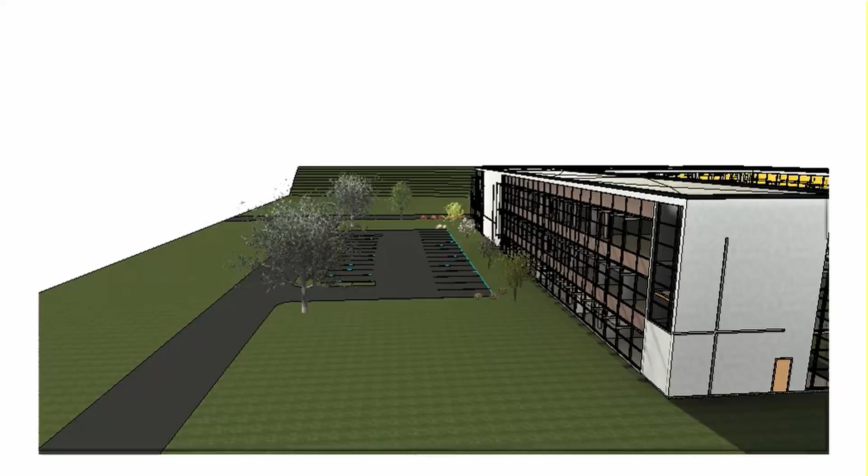Revit software is a building information modeling tool that allows building professionals to track and observe different design stages of the building life cycle in the virtual world.

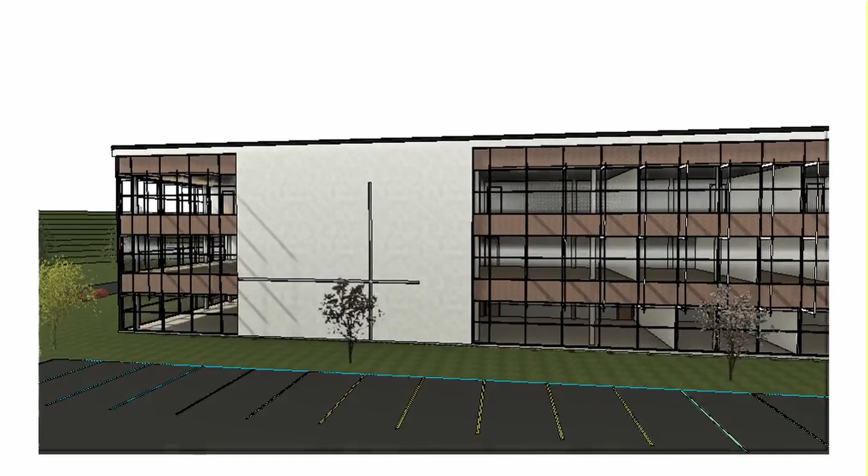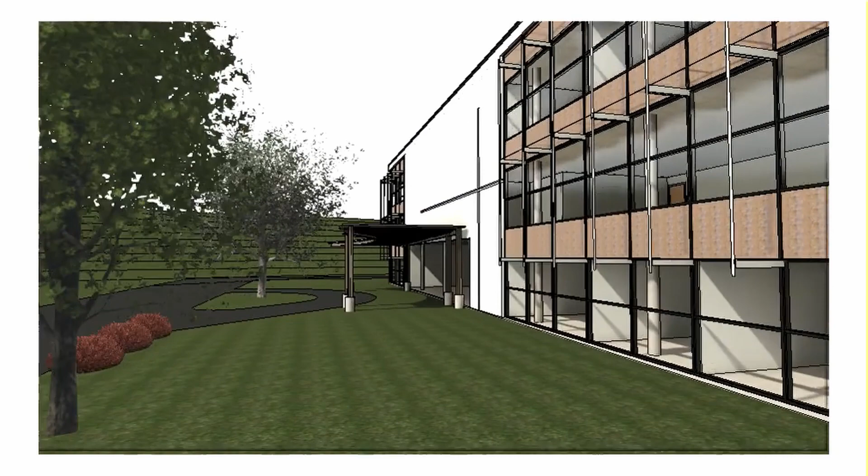In this course we will learn how to design a building and its structural components like walls, columns, floor slabs, and roofs. We will learn how to place stairs, railing, doors, windows, lighting, and plumbing fixtures. I'll show you how to annotate your model with 2D drafting elements and other standard architectural symbols, as well as how to access building information from the model's database, and many tips and tricks to help you use Revit efficiently.

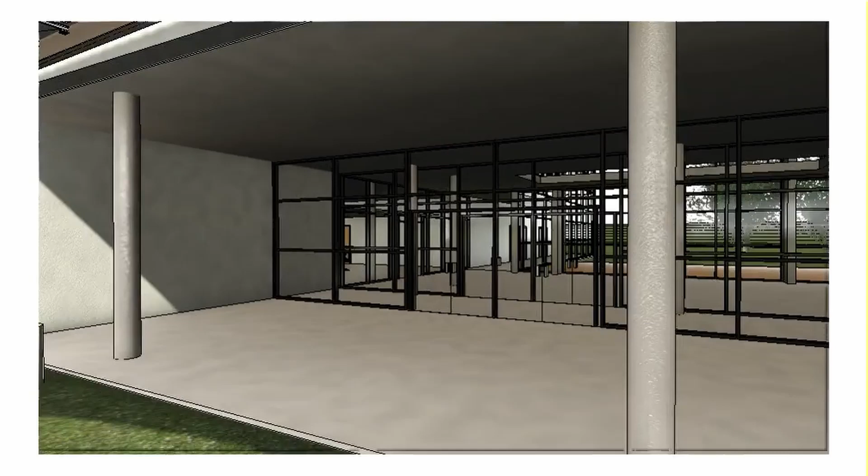So if you are ready to begin your journey to the world of Revit, you've come to the right place. Let's open Revit and get started.

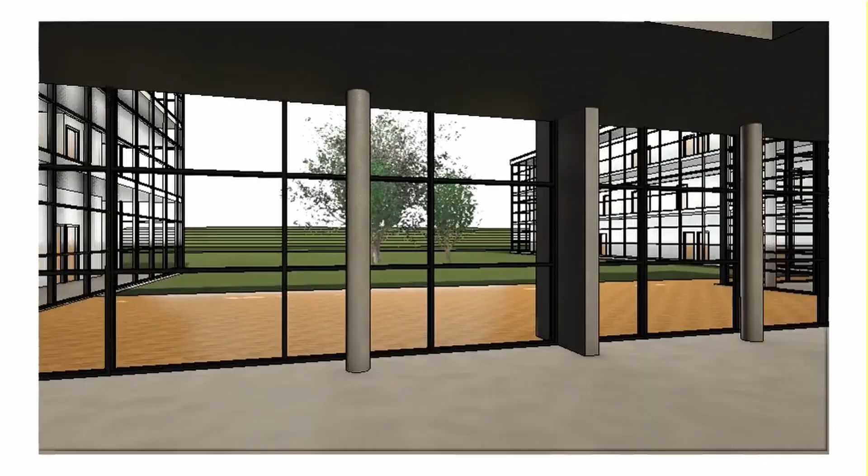So once you launch the software, you're going to be prompted with the recent file screen, which consists of two major sections, the models section and the families section. The models section basically is where you can create your own model, produce views, and show your ideas. Also, you can open an existing model or create a new one, or open the recent file you worked on from this part.

The families section works in the exact same way in terms of accessing them through open existing family or creating a new one. The only difference is that they are predefined individual components which can be used inside your project. For example, door families, window families, and so on.

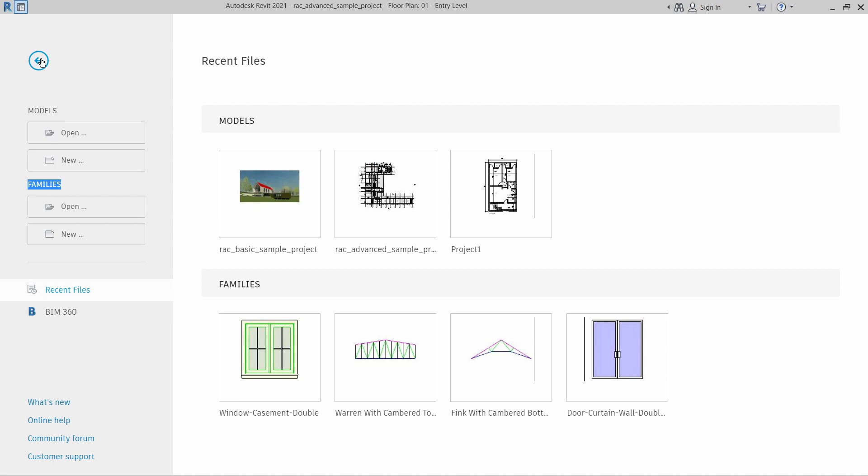The other way to get to models or families besides the recent file screen is through the application menu. We can access the application menu by clicking the File tab in the upper left corner of the user interface, where we have access to commonly used commands like any other software, such as new, open, save, print, export, and so on.

In addition, if you pay closer attention to the application menu on the upper left corner, there are two small icons for both recent documents and open documents. The recent documents lists the recent files you have opened, and there is a pin right next to each file name. You can pin it or unpin it to keep that file always pinned on the top of the recent file list if you want to, based on your preferences, which helps you to speed up your workflow instead of spending time searching for that file.

The open documents only shows the currently open files. This is very helpful to quickly navigate through files you are working on.

The Options button down here gives you access to overall settings that you can configure without having a project open. So once you open it, starting right on the top under the General tab, the notification area has two reminder intervals, Save Reminder Intervals and Synchronize with Central Reminder Intervals. The Save Reminder Intervals is used only when you work on a standalone project. The Synchronize with Central Reminder Intervals is used when you are working with a team.

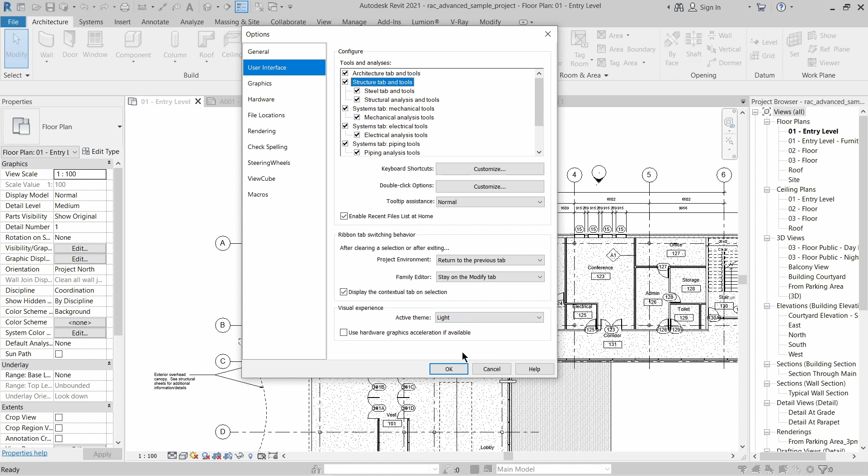For the other tabs like Rendering, Check Spelling, and so on, feel free to explore them in your spare time. But the most important thing is that once you finish configuring your options, don't forget to hit OK to save all your settings so you don't have to do it again with every project.

That's everything for today's video. In the next video, I'll be covering the most critical toolbars to access commands inside Revit, and you are very welcome to join me in this video.